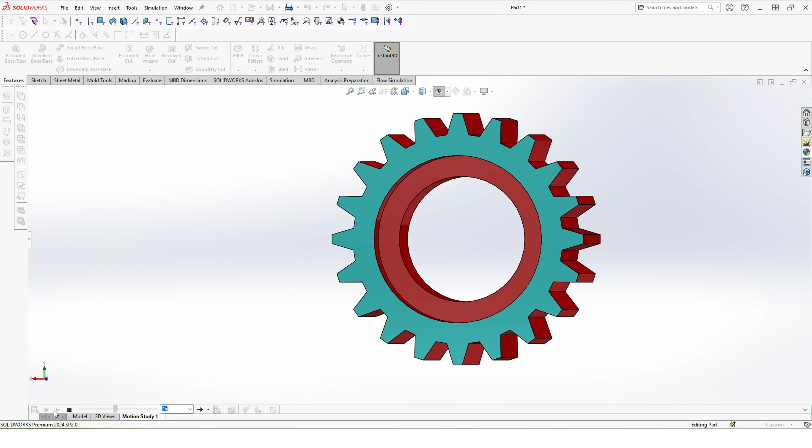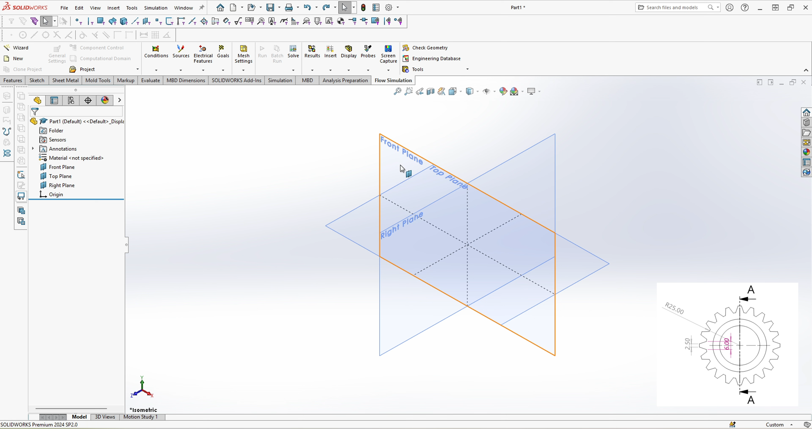So today we'll be drawing a gear, and we'll be starting by drawing this side of the gear first. So we're going to start by drawing the teeth of the circle, and you can see that the base has a radius of 25. So we'll start by drawing a circle. So we'll start sketching on the front plane, click on circle and start drawing from the origin. Type in 50 so that we get 25 in radius.

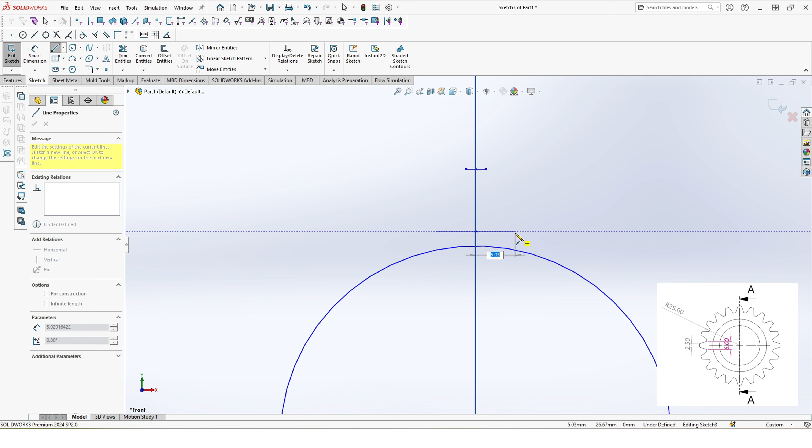Click on OK. Now I'm gonna draw a midpoint line anywhere over here, and that is going to be 1.25. Click OK. Now I'm going to click on the line again, and you can see over here that it's not actually 2.5, so I'm going to make that into 2.5, and I'm going to draw another midpoint line somewhere around here, and I'm going to type in 3 so that we get 6.

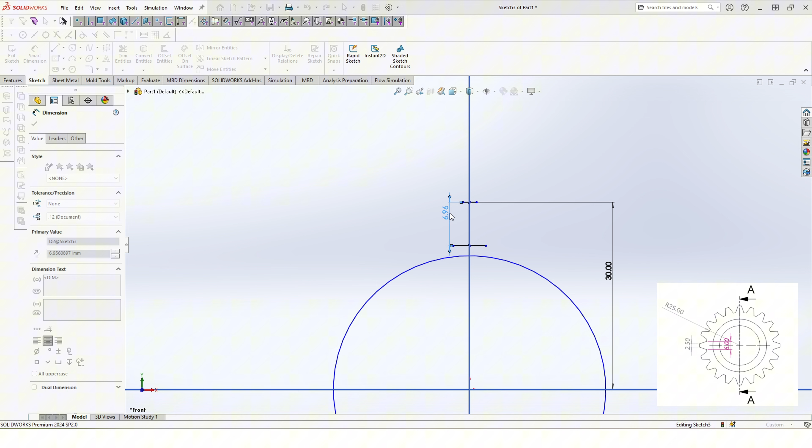So we're going to use Smart Dimension to set these lines at the right position. So click on that line, and then from the origin, type in 30. Now this line and this line, they're supposed to be 5. So now that we have changed the position of these two lines, the dimension of the circle would have changed too. So see, it is 42 instead of 50. So I'm going to change that to 50.

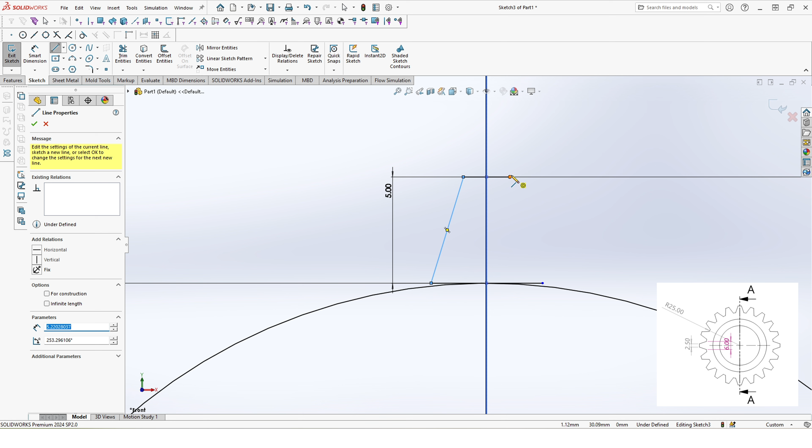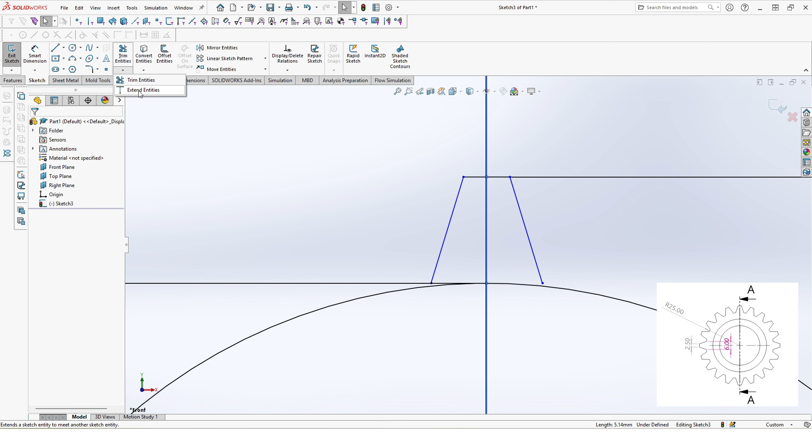Now we're going to draw a line from this point to this point, and another line from this point to this point. Now we're going to delete this line because we only drew that line for reference. And if you go to trim, and if you click on the drop down button, there's an option for extending entities. Click on that and then just hover over this line so you can see a preview of a line being formed. Click on it. Same here.

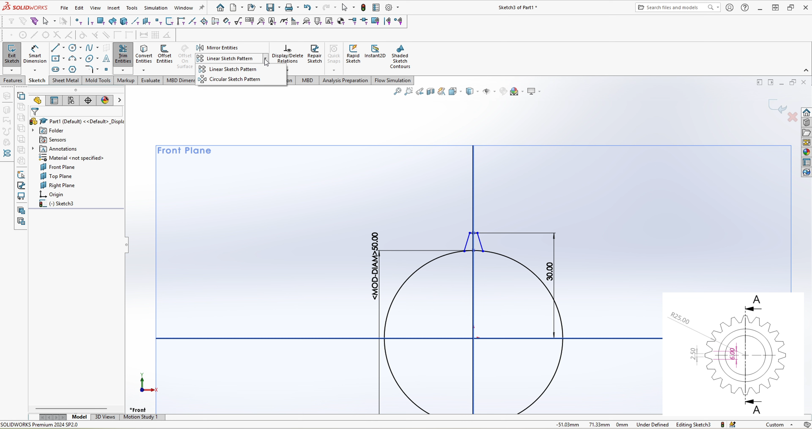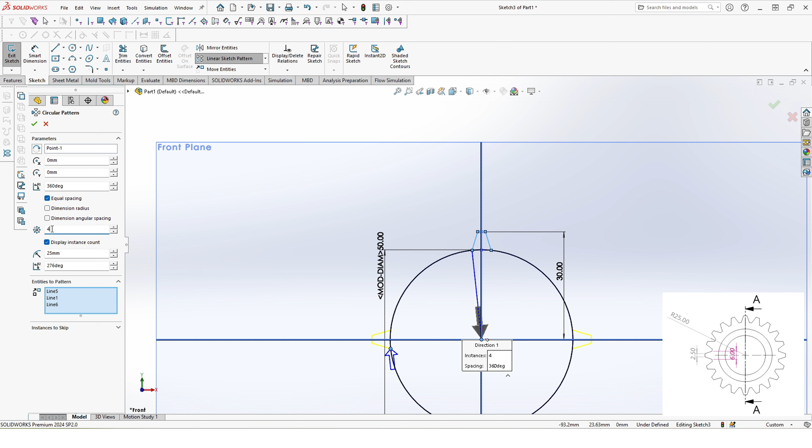Now we have to sketch these teeth all around the circle, and for that we're going to use the circular sketch pattern, and entities to pattern. Click on these 3 lines. We don't have to click on this line, and then now we're going to change it from 4 to 20. Click on OK. So we have sketched all the teeth. Now click on trim and trim these inner lines over here.

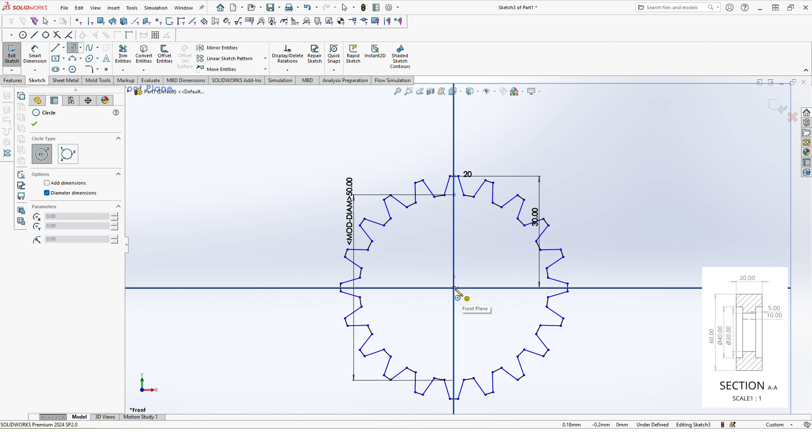And now we're going to draw another circle. So click on circle, and from the origin type in 40, and then go to features, and we're going to extrude it. And so with the drawing you can see that it says 20 in thickness, but we're going to type in 10, and then click on OK.

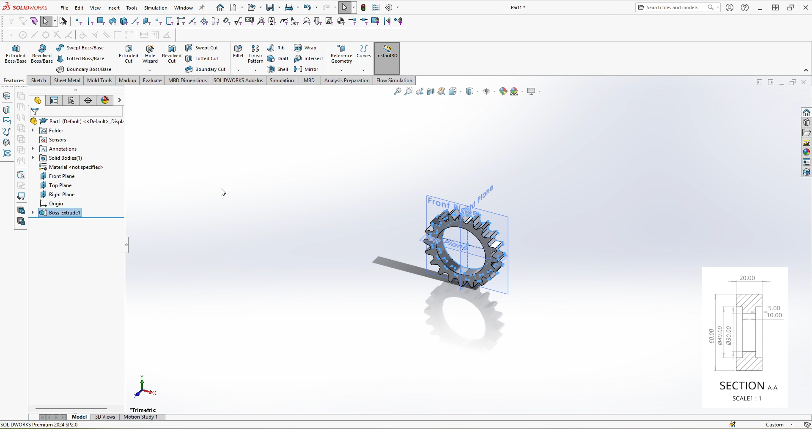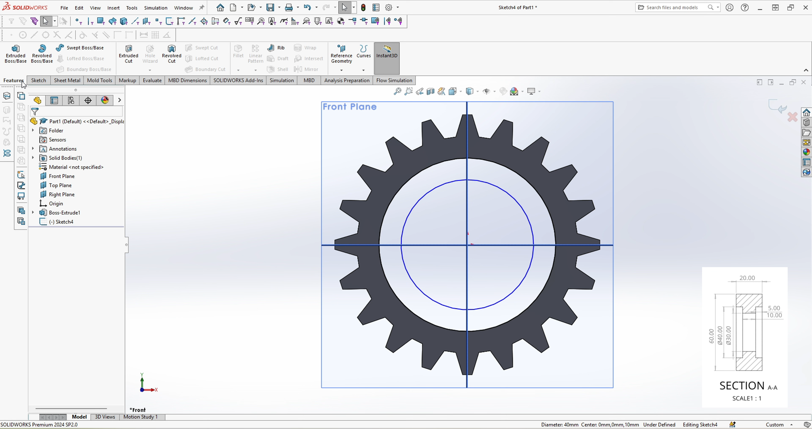Then we're going to sketch again in the front plane for another circle. Click on circle, draw a circle from the origin, and then type in 30. Then click on this circle, click on convert entities, and that circle's also been drawn. Now go to features, extrude boss again. So we're going to change it from 10 to 5. Click on OK. So what I've done is only made the gear 10 millimeters in thickness. The reason why I did it is to show you guys another feature we can use.

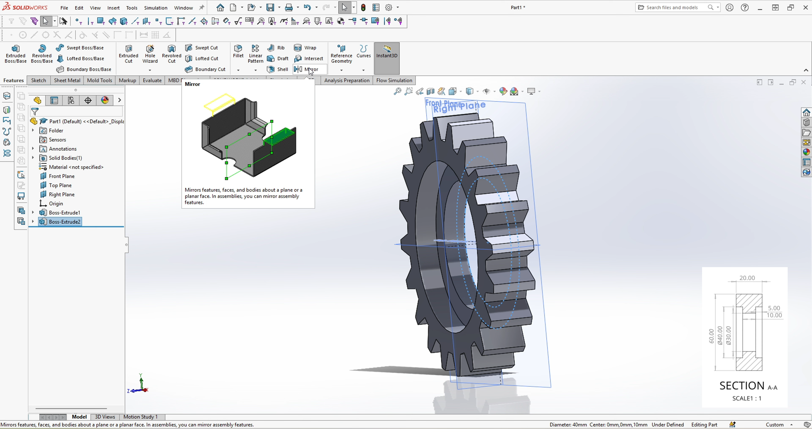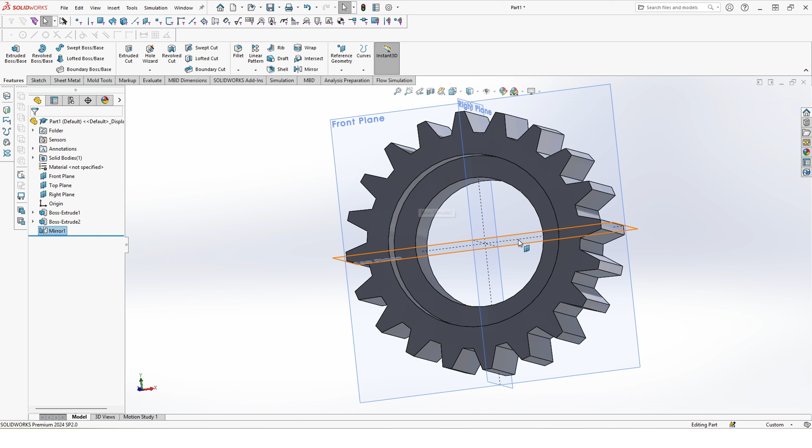So click on mirror, and then go to bodies to mirror, and click on the body, and make sure merge solids and knit surfaces are ticked on, and click here, and then click on this face over here, and then click on OK. So now the gear is 20 millimeters in thickness, and the holes over here have been formed as well.

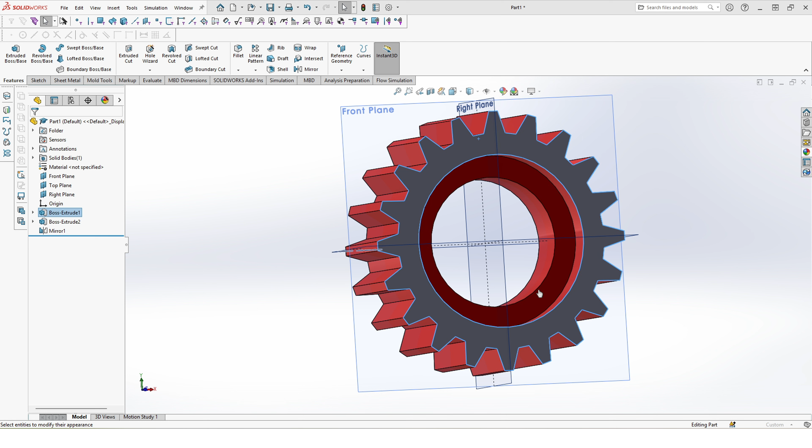And if you guys want, you can change the color as well. So click here, click on appearance, and click on part, and then I'm going to give it red. Click on OK. Now I'm going to change the color of this face. Click on appearance, and then click on face, and I'm going to give that a cyan color, and then click on this face as well. Click on OK. Into normal view.

Yeah, and that's it. So this is all we have for today.